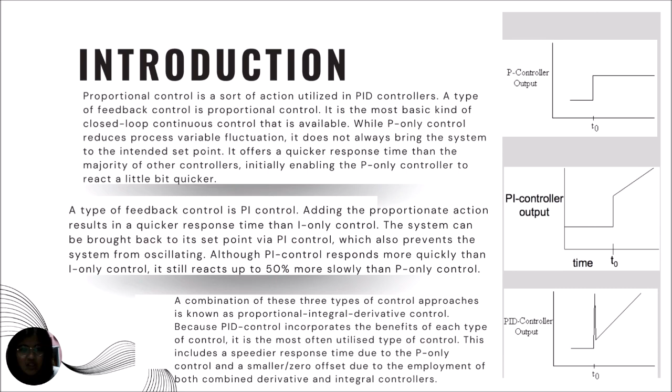And lastly, for PID control, a combination of three types of control approach is known as proportional integral derivative control. Because PID control incorporates the benefit of each type of control, it is the most often utilized type of control. This includes a speedier response time due to the P-only control and a smaller offset due to the employment of both combined derivative and integral controller. So this is the PID controller output.

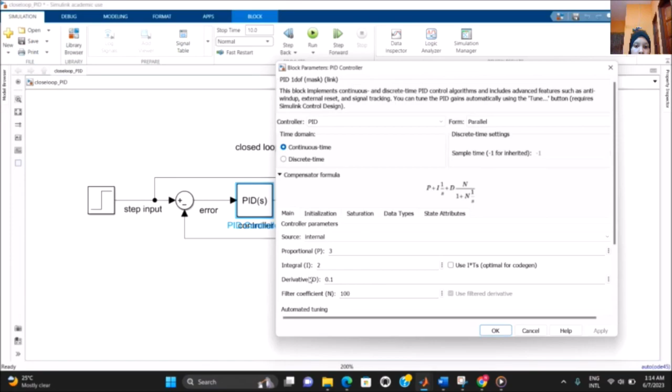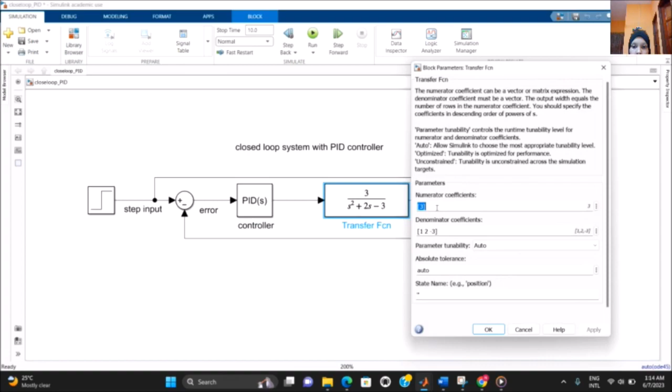Matrix number is 810020. The closed loop system with PID controller. The first component is step block, sum block. This is the PID controller. The parameters are proportional 3, integral 2, and derivative 0.1. Apply, OK. Next, the transfer function, the numerator coefficient is 3, denominator coefficient, apply, OK.

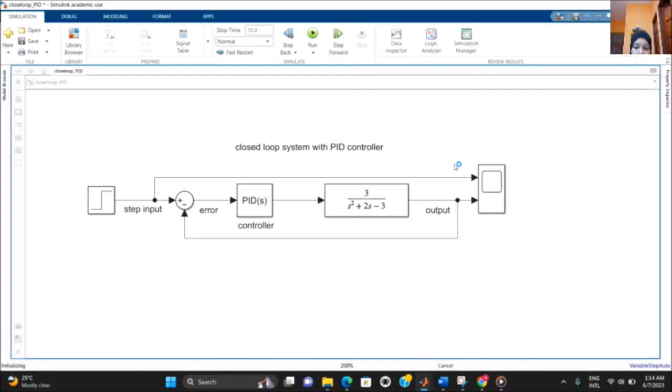This is the scope. I will run it, and the waveform is: the blue line is the time response, and it shows the overshoot here. The yellow line is the step input.

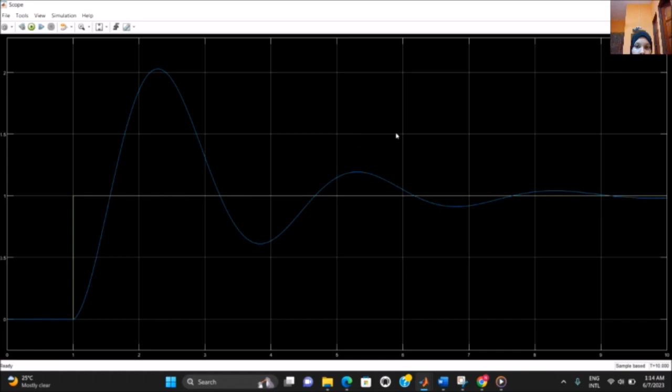DE210044. Okay, I will start my presentation with the simulation. So the first thing that I want to show is the open loop PID controller. Okay, this is for the open loop system. When we open loop, it will not be connected to the PID. So we just run the simulation, and we can see here this is the graph for the open loop system.

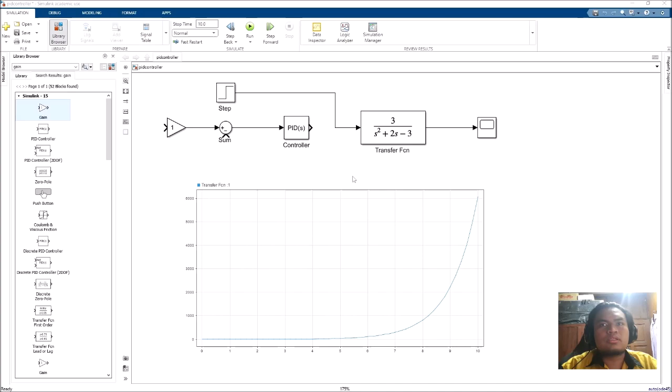So we know that an open loop system is a motion system where there is no position feedback of a moving object. And for the closed loop system, it means that there is feedback to the motion controller of a system. So that's why for open loop and closed loop, the graph will be different. For the open loop, the graph will go up, and for the closed loop, it will have peak time, overshoot, and also the steady state error.

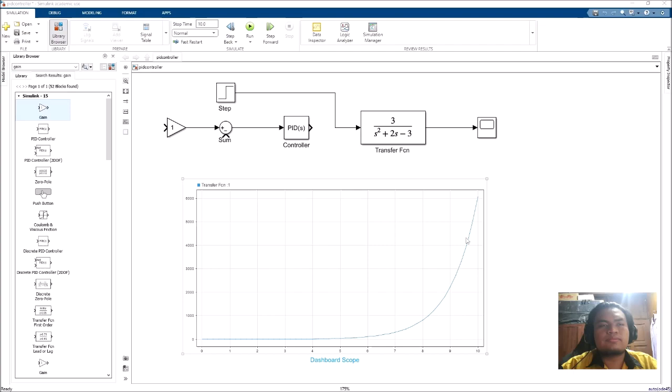Okay, we will go to the closed loop simulation. I will continue with the simulation of the PID controller. So today I will explain the P and PI controller. For the P controller, this is our transfer function, and this is our P controller. So we just enter the number for the P controller, open the block parameter, and here is the block parameter.

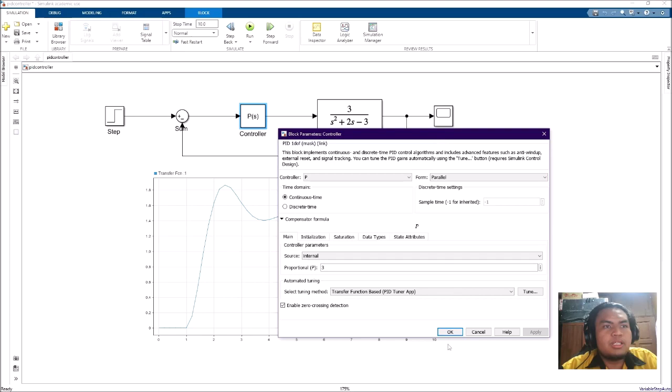So we just select the P controller, insert the proportional as 3, and we hit OK. After that, we just run the simulation, and it will show this graph. After it shows the graph, we can see that the overshoot is slightly higher, so we have to tune it. The way to tune it is to open the block parameter and hit the tune button.

After we hit the tune button, it will show this, and we can slide the response time to choose the best graph, the best tune that we can get. Okay, this is our parameter that we have tuned, and from here we can see the parameter. We can see here the value we entered earlier is 3, and the tuned version is 2.4.

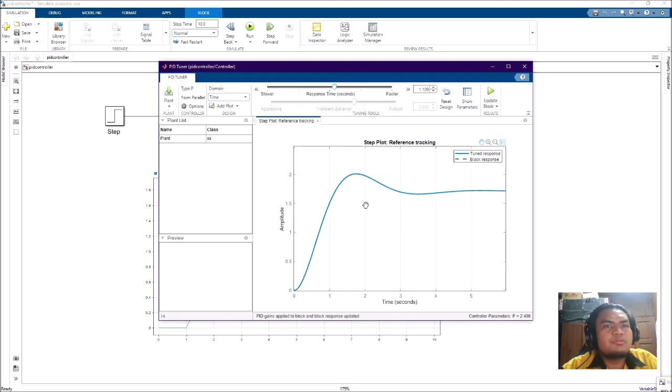Okay, after that, to apply this number inside the block parameter, we just hit update block. After we update the block, our block parameter will show the value. Okay, this is the tuned version of the block parameter for the P controller. After that, I will continue with the PI controller.

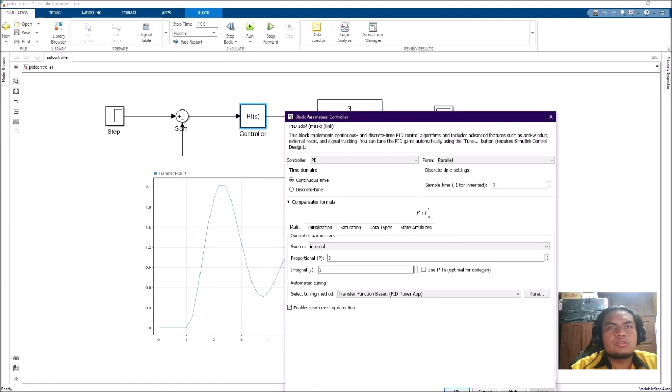Okay, we just enter the number inside the PI controller. For the block parameter, we just switch to PI controller. Proportional will be set to 3, integral to 2. After we hit run, it will show this graph. If you see this graph, it still has a lot of overshoot.

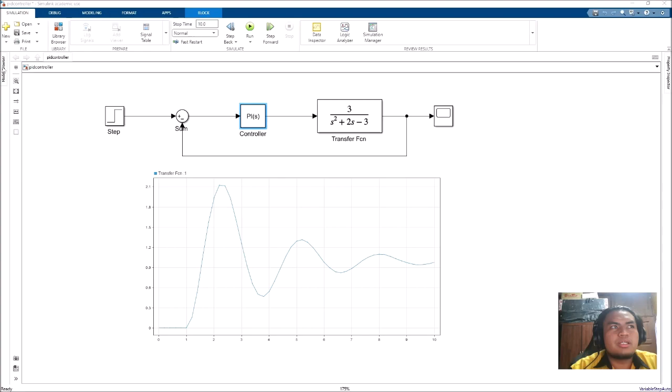So how do we tune this? We just open the PI controller again, and from the block parameter we just hit tune. After we hit tune, it will show the PID tuner. Okay, we can see here the graph will have a better settling time, and also the overshoot is not too high, and the peak time also from here.

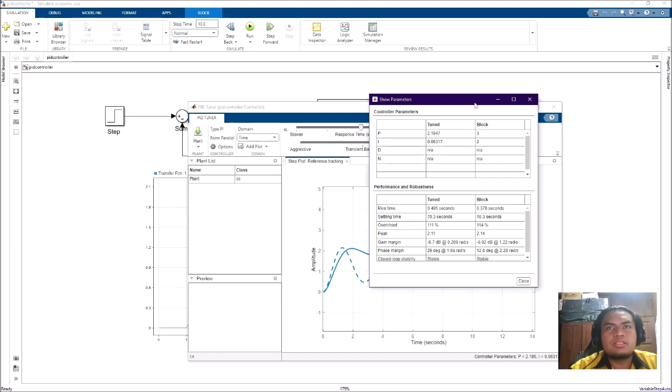So from here we can see we can slide the response time for slightly better, and we will see the parameter. Okay, here it will show the tuned parameter, P how much, I how much, it will give the answer. After that, we'll just have to update the block to apply the number inside the block parameter, which is here.

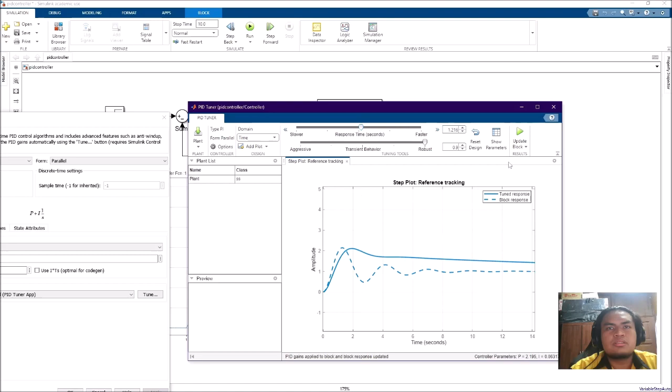Okay, we can see here, we will hit the update block. Okay, so it will update the block, and also it will insert the tuned number inside the block parameter.

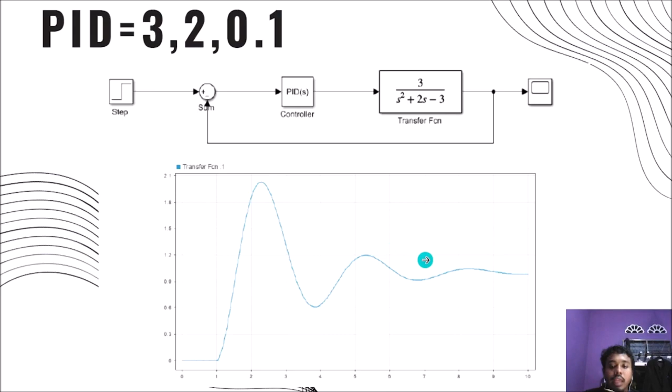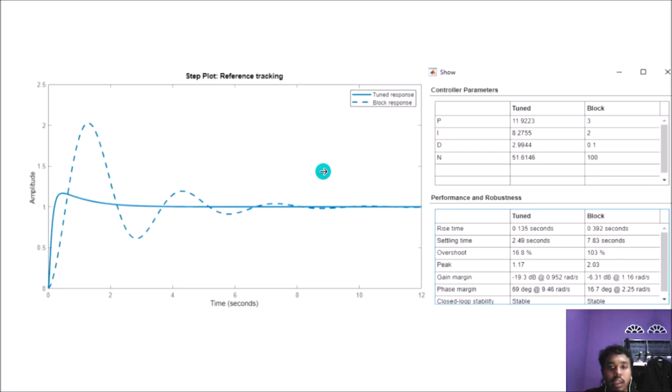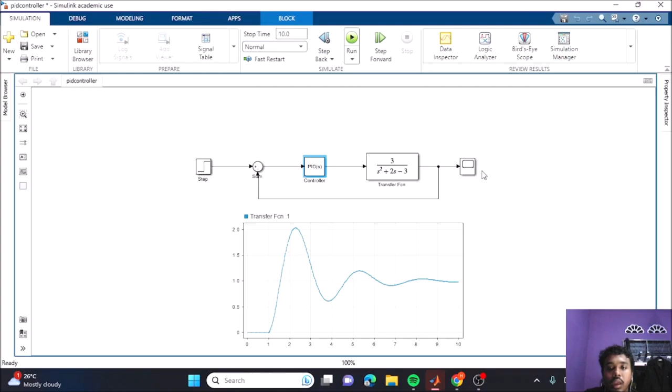Alright, I will show you in my MATLAB. So this is basically the circuit that I said, the closed loop PID controller, and this is the waveform that I showed you. After that, we press this run button. You press this scope, and it will get you this waveform. And you can press this PID controller, and it will get you this.

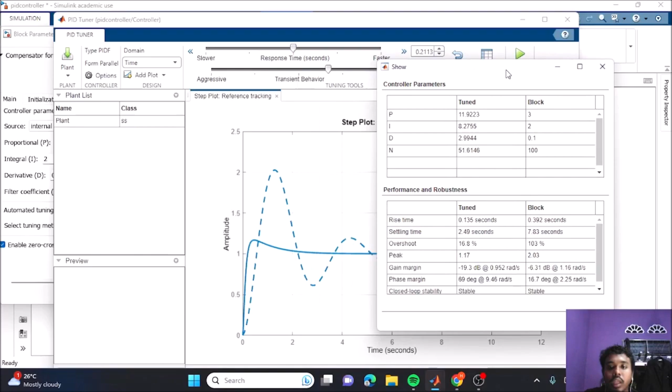So you can put the value for P, I, D, and this is the filter coefficient and equation that I said that apply at this value. And you press this tune, and it will get you this waveform, and you press show parameter, it will show you the value for all of them here.

And for your information, you can modify this by moving the cursor toward faster and robust, and it will get you the value for the new waveform, more stable and smooth. Right, you press the update block.

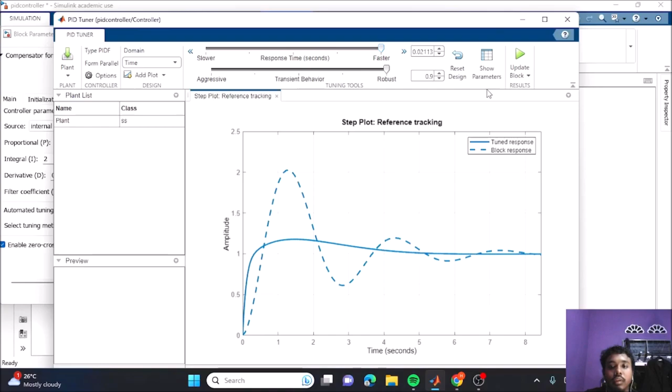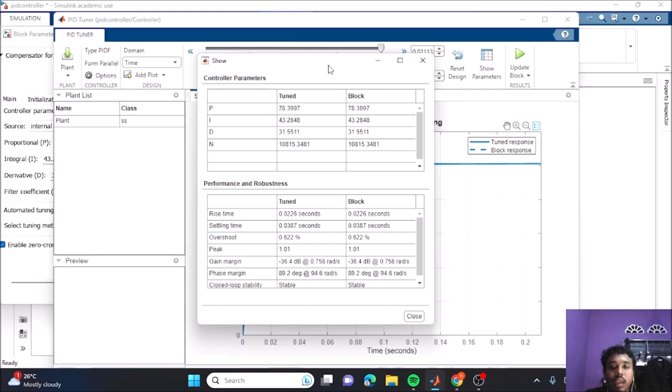Alright, so as you can see, after you press the update block, this PID value is already adjusted to become more improved and more stable. For this, you can see the settling time becomes the same, stable. You can see the scope already has the same value, same waveform like this PID controller,

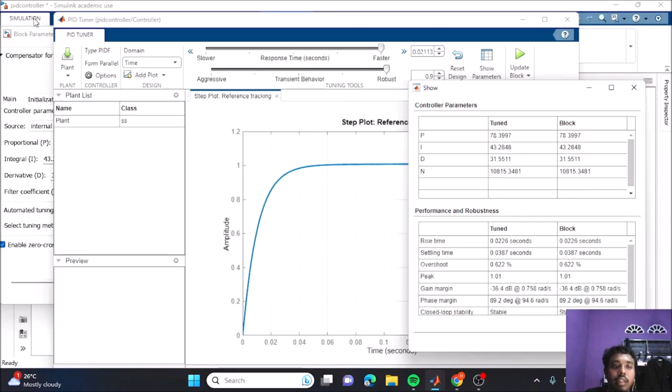which is 0.0387, which is here, nearly here, which becomes one line. And this block parameter also changes. You can see this change for the value, the suitable value for this PID controller. Alright, so the conclusion for this PID controller is to continuously improve the waveform,

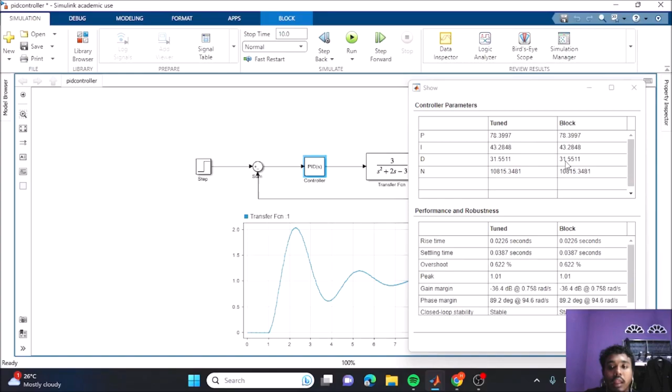which adjusts this PID value. Conclusion: positive outcomes were obtained from the simulation using the MATLAB Simulink software in the closed loop and open loop system. The closed loop system employs position data for accurate positioning, and open loop control functions without positioning feedback.

The system response was overshoot despite the big reduction in rise time. Steady state inaccuracy is addressed by the PI controller, although the stability and reaction time are adversely affected. The PID controller provides short reaction time, minimal steady state error, and

optimum control dynamics. It has a wide range of applications for higher order processes with numerous energy storages and combines all the advantages of the PI controller with the inclusion of the derivative gain component. Overall, for control dynamic stability and various energy storage, the PID controller is a better option.